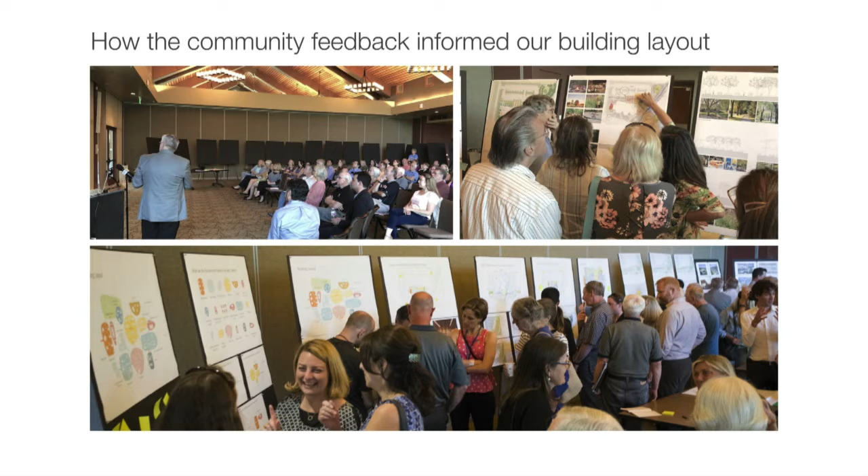So the town halls, we had 2 of them early on in November, almost a year ago, really almost like 2 weeks ago, 2 weeks from a year ago is when we started this process with our first town hall. And we had 2 town halls where really the focus was programming.

And that's where we learned about what spaces we would need to incorporate into the library. Then we had our town hall in June, in the middle of the schematic design phase. Then we completed schematic design and presented to the city council. Now, in November, we're at the midpoint of design development. So that's where we are time-wise.

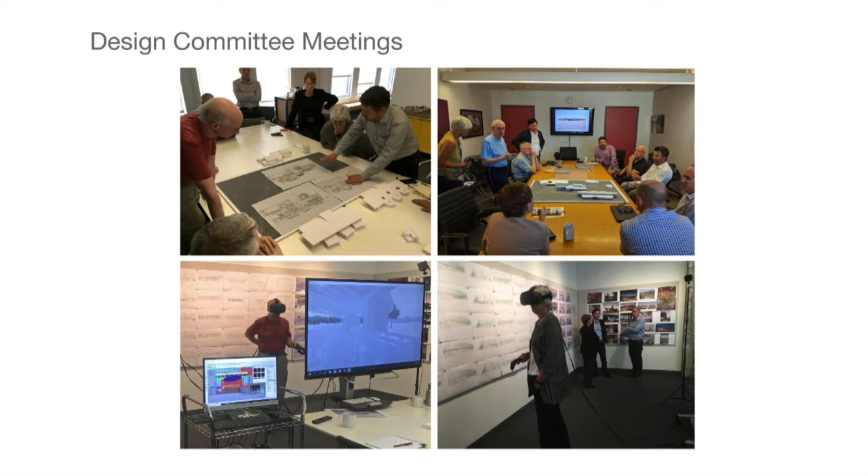And here we are in our design sessions with the subcommittee meeting. In terms of location and our site, one new piece of information from our last town hall is we now know with some certainty who our neighbors are.

We have the ball fields to the north of us, and housing development to the west. We're really happy with how this turned out, because it's a great opportunity to have a symbiotic relationship with Rec and Park at this point—we can share site development, site improvement, and site strategies in a smart way. Since we're all working on these projects at the same time, there's a great opportunity to stitch this together cohesively. So we're excited about that.

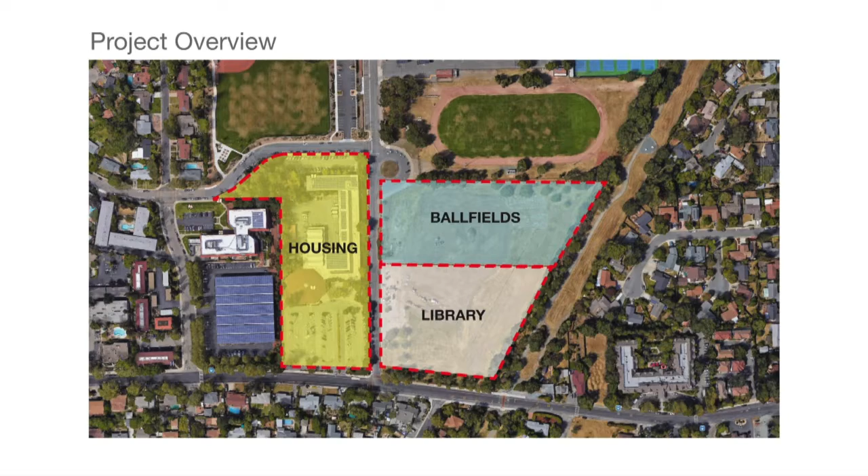Before I pass the mic to Sarah, who's going to take us through the site and landscape design, just a brief reminder of some of the principles that have guided us throughout this process. They've been with us from the very beginning of the design process, and they've held true for us.

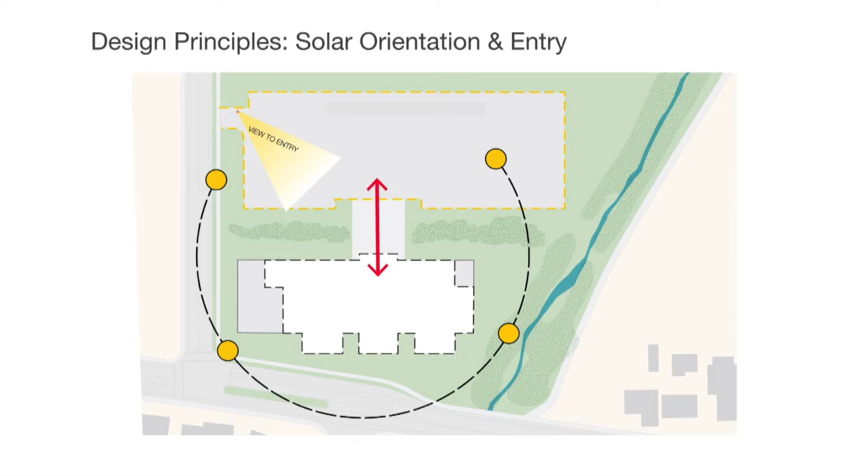One is the orientation of the building, which is elongated along Oak Park. Now that we have the ball fields to the north of us, positioning the building this way allows the parking to be between us and the ball fields, so we can share the parking—a smart way to reduce the amount of asphalt in our landscape. It's also a great orientation for solar purposes, minimizing western solar gain.

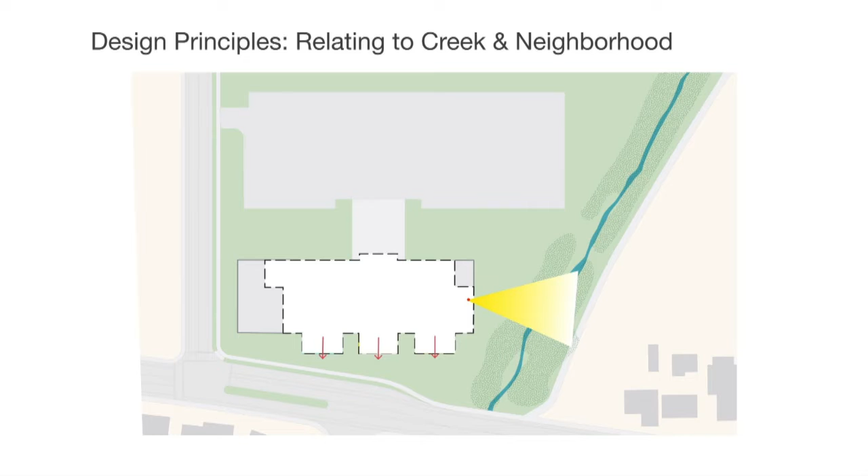We've also paid attention to the views to the creek, which has been a guiding design principle for us, and thought hard about how to mitigate the scale difference between this building and the houses across the street—adding these sort of pavilions, which has been true with us all this time. And lastly, thinking about how the building should be welcoming.

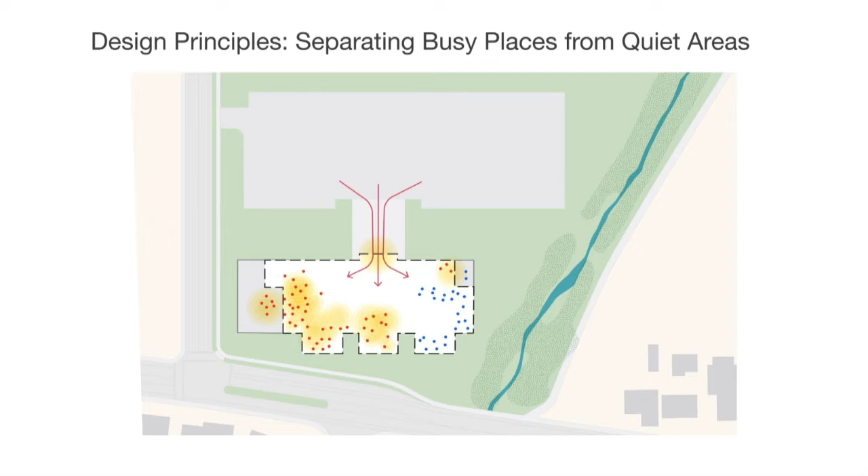When you walk in the door, you should feel like you've been embraced by this environment. The orientation of the building, its length, and these ponds allow us to begin to deal with this delicate balance we're trying to thread—having one intergenerational space that everybody feels part of, while allowing for some busyness in one area of the building and a bit more quiet at the other end. We'll get into that.

What was that? Is that an email reminder?

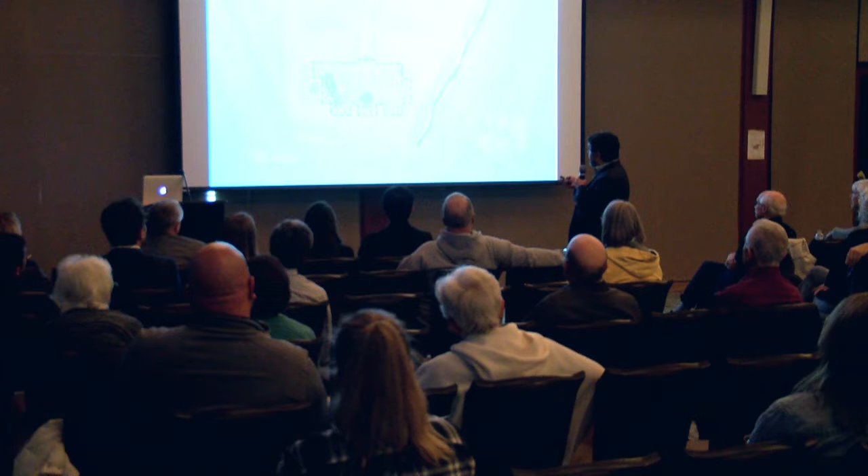So you'll see these threads carrying through, but at this point, I'll have Sarah take us through the site and landscape design.

Thank you. Sorry, a little loud there. Can I stand here? You may. Okay, I'm not going to do this—I can't do two things at once. Does this go in here? I guess I'll hold it. That's fine. No. How's that?

Okay, well, we're super excited to be back, and we've been working with the architects and really the whole design team on putting together not just what's left after the building, but a cohesive design that puts together the building, the landscape, and the ball fields as well.

Since the beginning of the project, one of the things we heard from the community, and one of the things very particular about this site, is that it's next to the creek, and that was very important and very clearly stated early on. We've given a lot of thought to how to be near the creek without overtaking it, and how to be realistic about what our project can do.

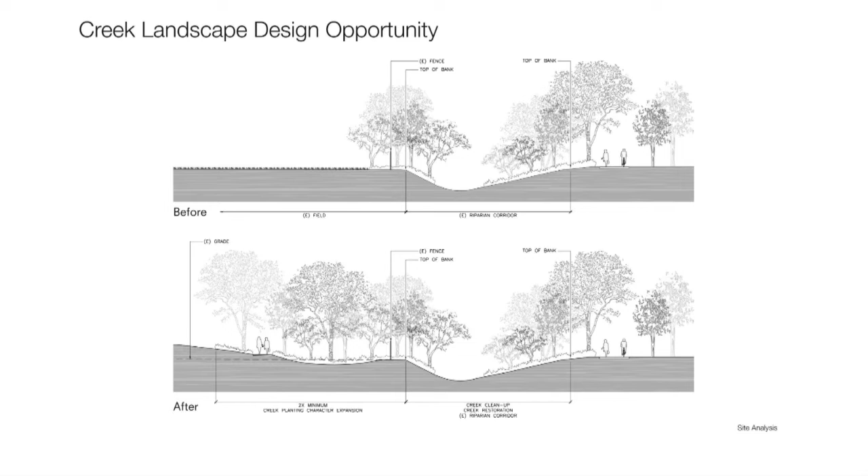In the existing condition, the creek is pretty narrow as a landscape experience—there's a smallish channel, and then it goes fairly quickly to the field on our side. So a big part of what we want to do is augment the planting on our side and make more of this wonderful setting of the creek.

We won't be working in what would truly be the riparian channel, but we will be augmenting that feeling of being at the creek. I think to the average person, they wouldn't know when they cross the line into the riparian channel. So we've thought a lot about that, and about how to have enough space between us and the creek on that side of the building.

As we've developed the project, you'll notice a couple of things if you're paying attention. One is the building used to be at a slightly different angle, and it's rotated ever so slightly now, so it's squared up to the parking lot. It's also a little smaller, not a lot smaller, but a little smaller, and there's a little more space between the building and the creek.

And we've made a much bigger gesture that we're calling the garden, but I think it could also be called a habitat buffer or a natural garden. It's not a garden in the sense of a manicured garden.

The program you see on the right is what we worked on with all of you and with Margaret to establish what's going to happen here, what things need to happen in this place. I'll talk about these in more detail, but they're the ones we showed you at schematic design, and the ones we still have today.

Part of what we're doing is trying to get things located near the library to extend program outside, but also to connect trails for bikes and peds, and create a sense of arrival beyond the actual site of the library.

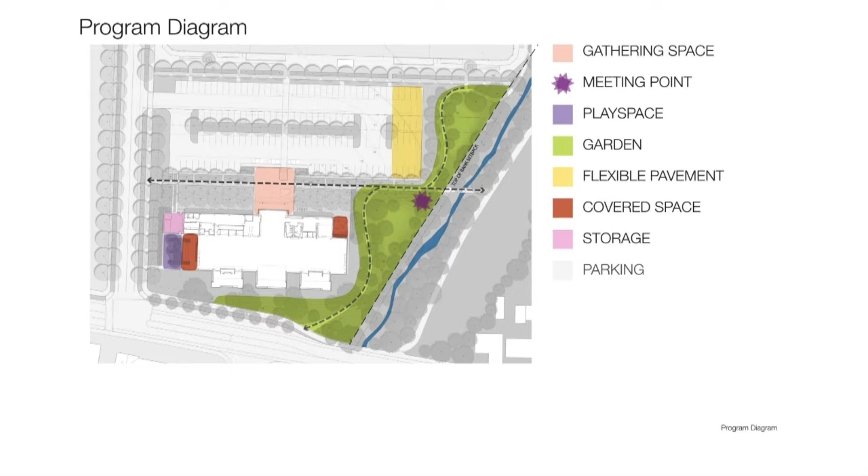For today's conversation, just for tracking, we'll walk around the building, starting with one, which is Monticello Avenue, and this new opportunity to arrive at a set of civic places - the library, the ball fields, the middle school, the other park - an amazing set of things for a community to have near one another. We'll also talk about the yard, a space that is fenced but outdoors and part of the library, the arrival and drop off, and then finishing with the creek.

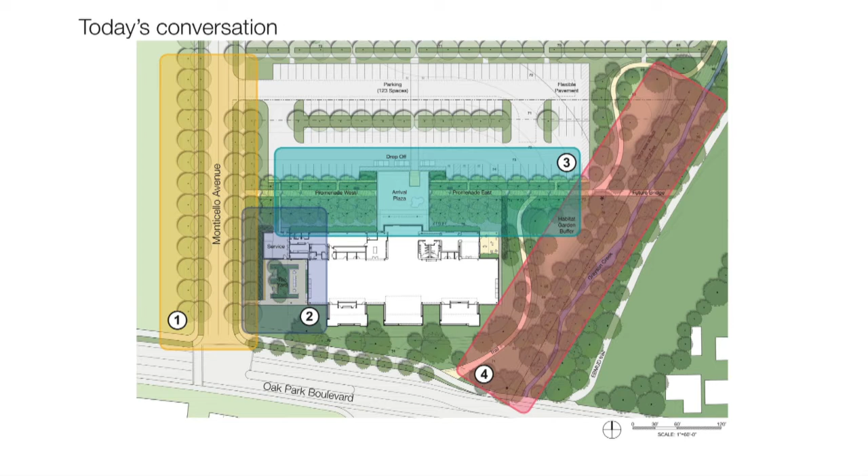So first, Monticello. Monticello is under study right now, but we feel we will be able to achieve a section that is really welcoming and civic and makes you feel like you're supposed to come here. It has bike lanes newly on it, and it will welcome you into all of these amenities with a kind of stately planting.

I'll talk specifically about what plants and that kind of thing at the end of this, but we're working to have plants that will be appropriate to this climate, but also have a kind of stature and elegance that is appropriate to the community.

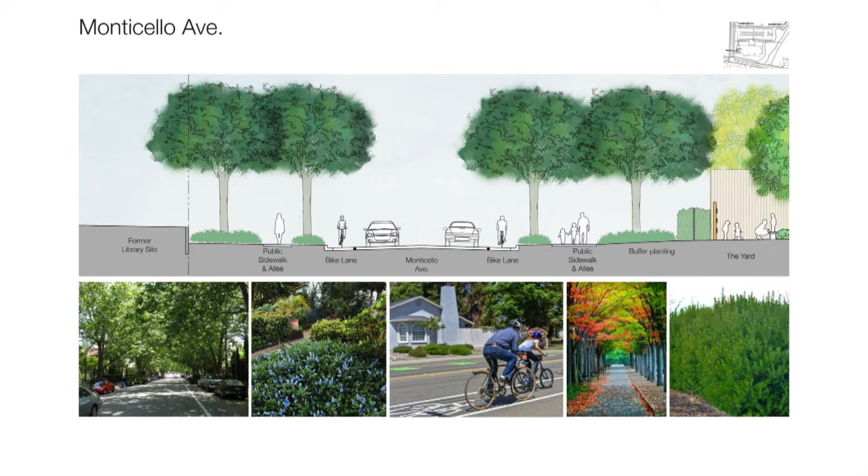The yard is located immediately adjacent to Monticello Avenue, and this, I think, is going to be an incredibly important place to everyone in the community - to have a place where you can come in the front door of the library, be outside, and then also go back into the library. It's a secure space. It will extend a lot of things that are already happening inside the library.

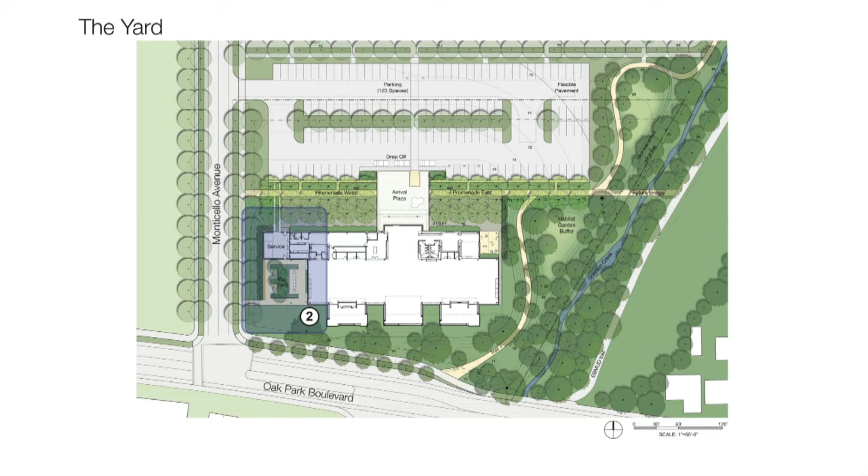We've talked about it as an opportunity for just a view to a garden, and there's going to be beautiful trees in the space. It's also a place where if you wanted to do paper mache and slosh water on the ground, or maybe have a visiting petting zoo with goats - we've talked about all kinds of things - this is where you could do it, so you didn't get the library dirty.

There'll be some opportunity for play for kids that's more vertical on the outside wall, and the actual floor plan is a circuit, so kids can run around. So if you're at story time and getting wiggly or need a snack, you can come outside and do something, then come back in and join it. But also at other times of the day, it would be a great place to read a book outside under the shade of these trees.

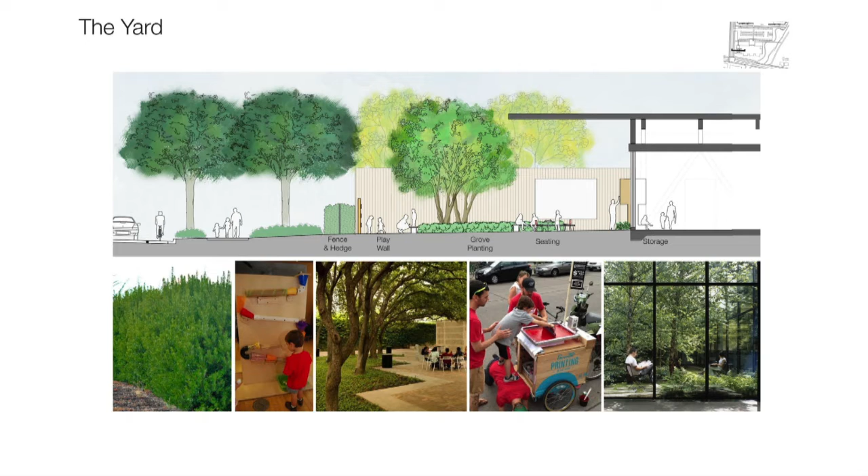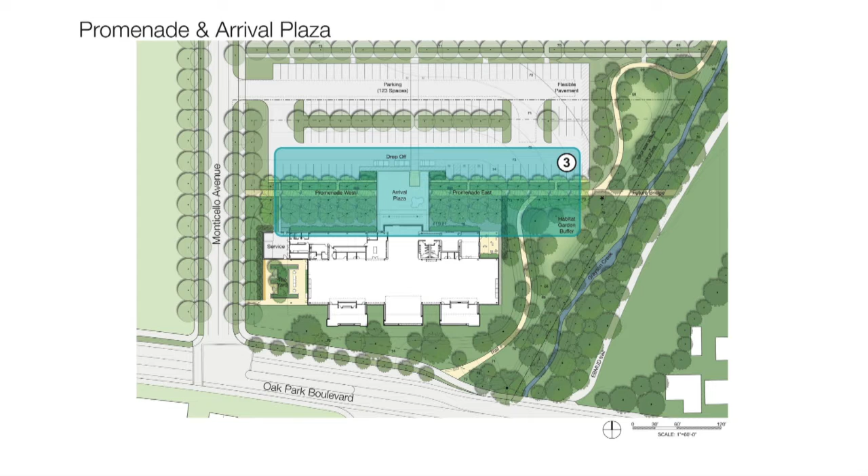The promenade and arrival plaza is something that a lot of thought has gone into, wanting it to feel very welcoming, thinking about the microclimate of where we are and wanting to have shade, wanting it not to feel that between 2 and 5 p.m. on a school day you have to cross a gauntlet of middle schoolers to get in the front door, and a number of other design parameters of what would make a really elegant entrance to the library that was welcoming. David's talked a lot about this sense of an embrace as you arrive, and I think the trees together with the building are making that happen.

The way this is currently structured, the building roof for the entry lifts up and sort of welcomes you in, and on either side of it there's a grove of a triple row of trees that has gravel underneath it and movable furniture, so if you wanted to sit out there, very stately. We've talked a lot about the character of these trees not being too dark and shady, allowing views through.

And then we're still talking about having a place in the parking lot where you can sequester off a small piece of the parking lot pavement to use for other programs. So we're getting double purpose out of that paving.

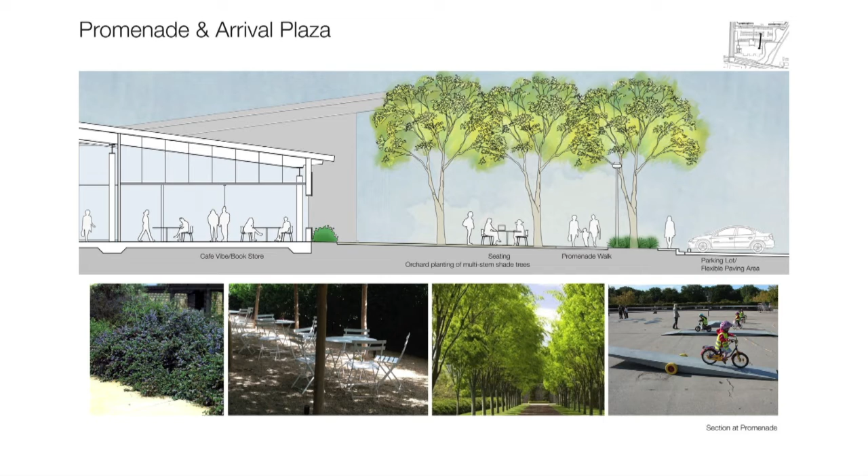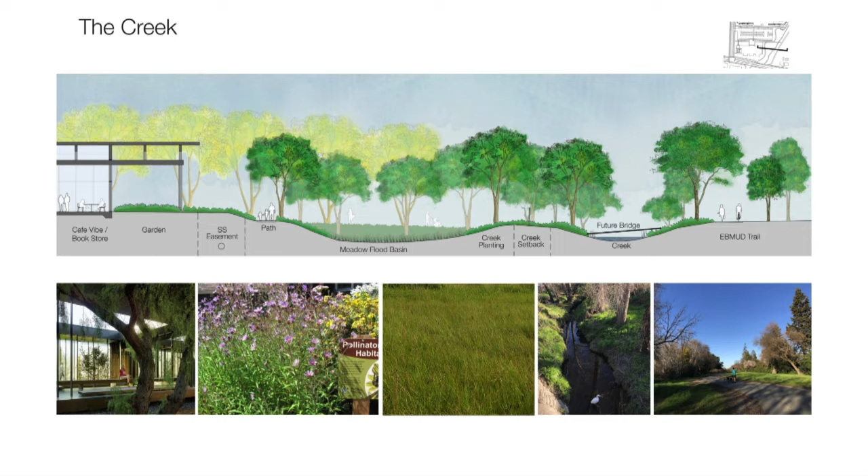The last part is probably where we've had the most change, and in some ways is really exciting for the project. We've been looking at how to control the area and how to make it successful in terms of a buffer for the creek and also a great setting for the library. There is a meadow that will also be able to take additional waters as needed. So we're imagining there's quite a bit more space here now that allows us to have a really robust piece of native planting with trails on this side of the creek, and potentially in the future to connect across the creek to the EBMUD Trail.

In all of our thinking about this, we've talked about plants, and we've talked about wanting plants to be an important part of the design. We've actually worked hard to minimize the amount of pavement in the design. Some of you know a lot about plants, and I would love to talk to you in great detail about it after the presentation. The main thing I wanted to communicate to the group is that plants are tricky, and you're always weighing a whole bunch of criteria.

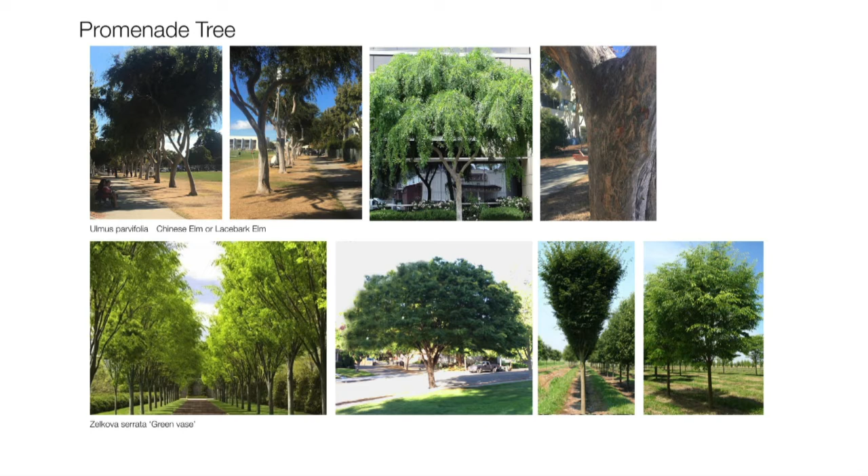Currently, the majority of the plants are native. There are some places, like the promenade tree, where we're considering some things that are climate appropriate but not necessarily native, for structure, for form, for matched specimen availability, and we'll continue to work on this as we go forward.

At the creek and in the upland, where we're augmenting the creek landscape, we have a sort of oak-heavy palette, I would say. And we also have a palette that isn't making places that are too dense at the ground. We're trying to keep view lines open and make it seem like a very spatial landscape you can look across in this area.

So in conclusion, I think the big shift in many ways for us in terms of where we were in schematic design versus where we are in design development has been that we have more space between the building and the creek, and we've really been attending to questions of sustainability and how to deliver the project within the budget with maximum sustainable value. So we have a habitat garden and buffer, which has gotten a lot bigger. We have stormwater treatment in that area, which will be great for making a range of plant palettes and types.

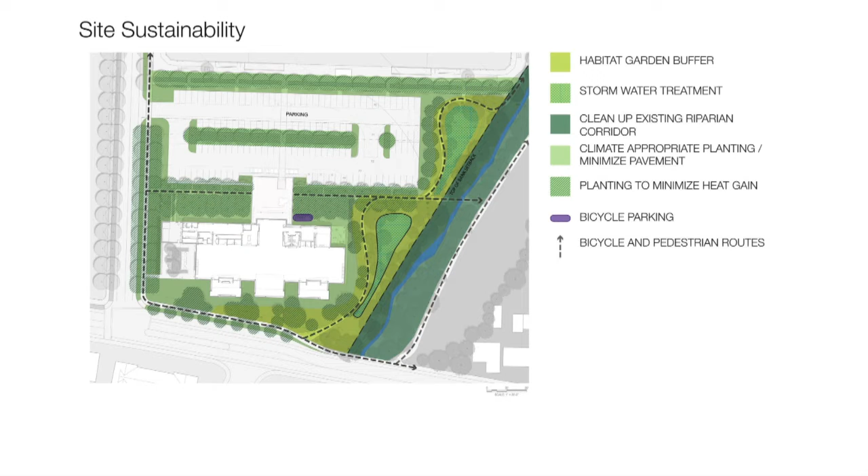We'll be cleaning up the existing riparian corridor, which means removing trash and removing invasive plants. We're working to have connected trails and a great bicycle experience. And we're working to minimize heat gain, both on the building and also for heat islands in the parking lot. So when you look at all of this, and consider that we're sharing the parking lot with the ball fields, we really have a lot of planting and not so much paving, which I'm personally super excited about.

And that is an update on where we are to date, and I'm going to pass it on to Mike.

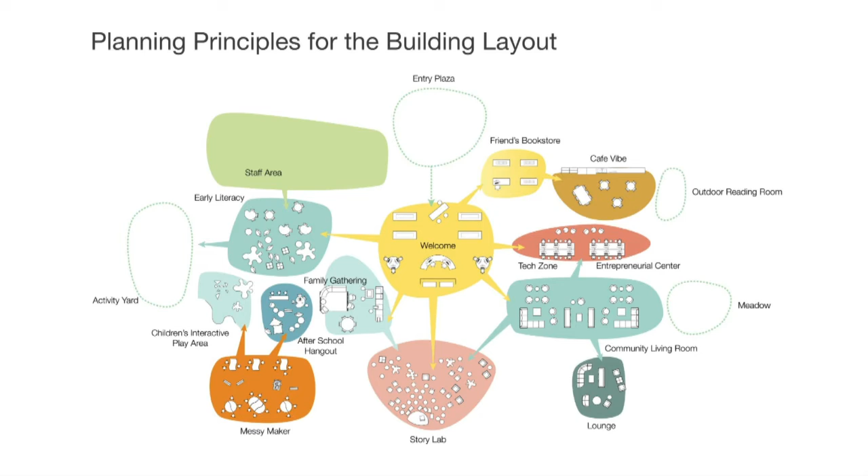Before we launch into our updated renderings and views, I wanted to remind everybody of the planning principles that guided the development of the plan and ultimately the project. This is an image we've constantly been updating since programming, which talks about the places and spaces of the new library and also their desired adjacencies. This has mapped out into our current plan.

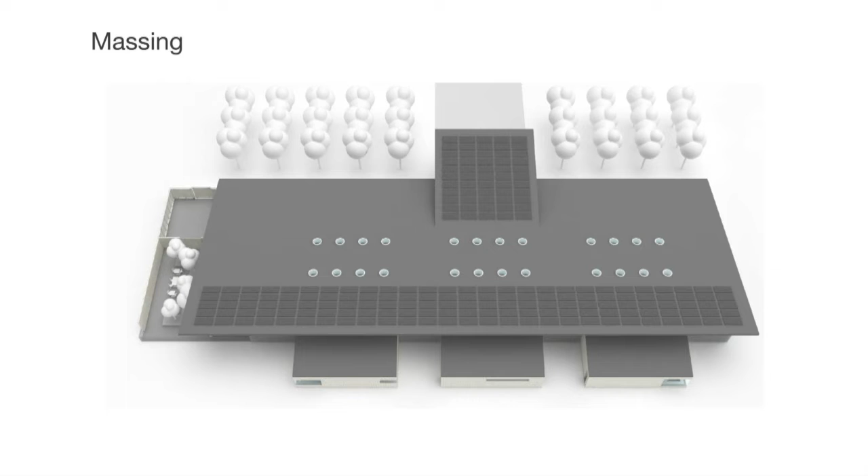So this is the same view with the roof put back on. We can talk a little bit about the massing of the building.

The main hall and most of the northern portion of the building has a large sloping roof that's sloping up towards the south. The roof is lower above the spaces at the top of the building that don't need such a high ceiling, and the vaulted ceiling really starts when you get into the main hall.

The entry has its own roof element that pitches the opposite direction, towards the north, so we get this really tall north-facing wall, letting in a lot of beautiful light to the entry space.

And then the 3 pavilions to the south help, they have this volumetric expression which relates a little bit to the neighborhood across the street, and help shade the building a little bit from southern sun.

Two rows of skylights are shown here to get diffuse, balanced light deep into the floor plate of the building, and we're showing areas for solar panels on the roof. We're working through this with the city, and we'll be fine-tuning this as we get more budgeting in place, but this is something we're hoping to do.

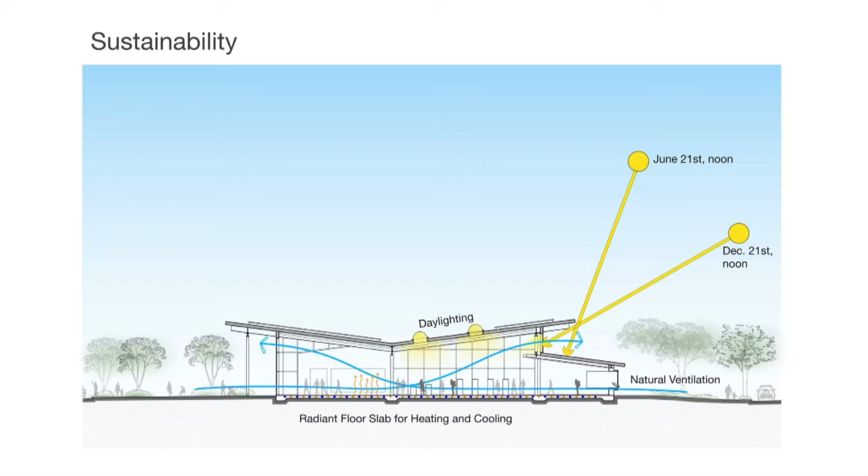Other things — we already mentioned the solar panels, you can see that diagrammatically shown here.

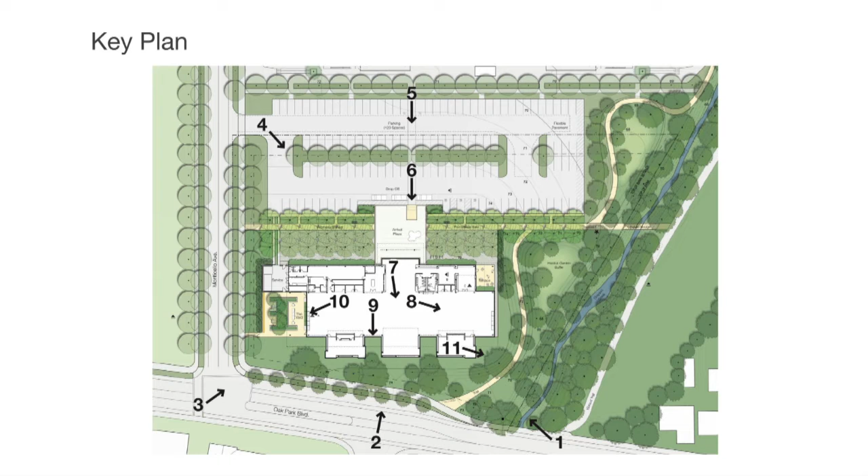So you'll see here the arrangement of all the trees that's proposed, but for the benefit of showing you the building, and to not discredit everything Sarah has done, we've made these trees relatively transparent so you can see the building. In actuality, the landscape is going to be so great that the blend of building and landscape will be a really rich pairing.

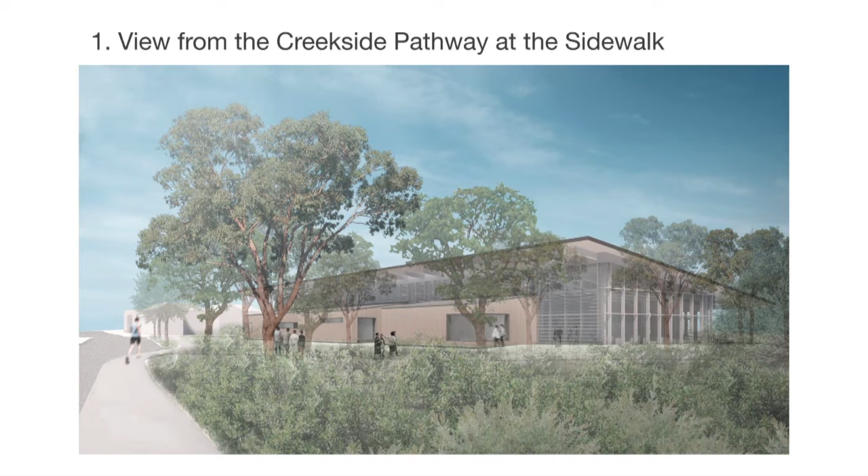The modulation of this facade has three elements we call the pavilions. They each have a similar material palette, but are purposely designed with different window arrangements to relate to the activities going on inside, and to describe some variation of what's happening throughout the library programming. In between these pavilions are a series of glass walls shaded with a series of louvers, which we'll show in more detail later.

This allows views to the exterior and inward, while protecting the building from incoming sun. So the objective of the sustainable strategies Mike described was really to give the space a very welcoming daylit environment without all the incoming solar gain from the sun.

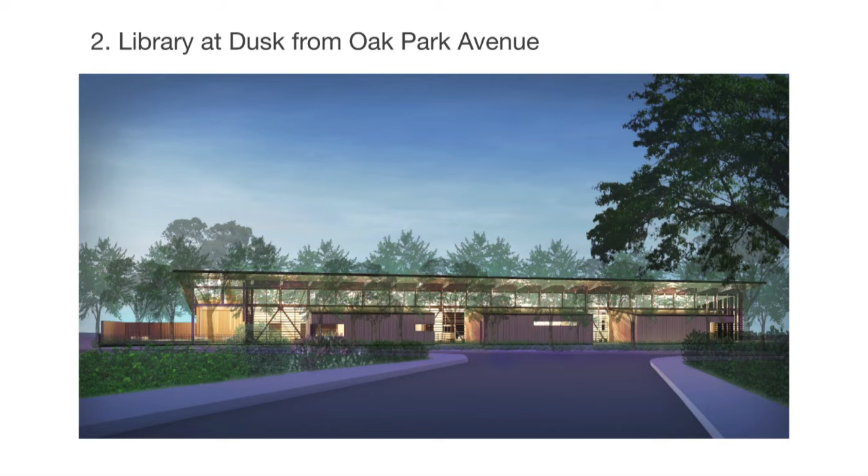The yard, at one end, is semi-enclosed, but also allows for visibility along Oak Park to see the activities that might be occurring in that space.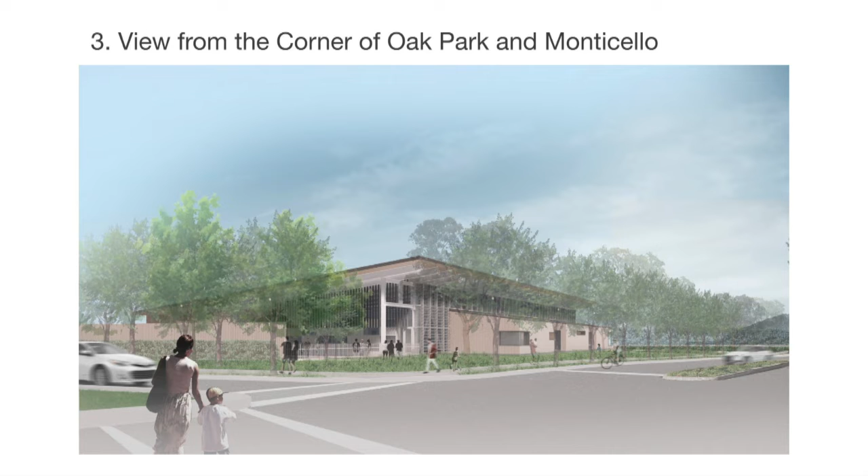Next view to the corner of Monticello and Oak Park. Again, the yard view is a semi-protected zone with transparency allowing the view in. At this point there's a hint of the story area for the kids, not just the lab, but the interactive zone just inside, underneath this covered roof form.

You saw this earlier - we've made the turn up Monticello into the parking lot. As you arrive at the building, this would be your view, aiming your turn right at the primary entrance. As Mike described, it's rising up, a welcoming gesture to all the visitors.

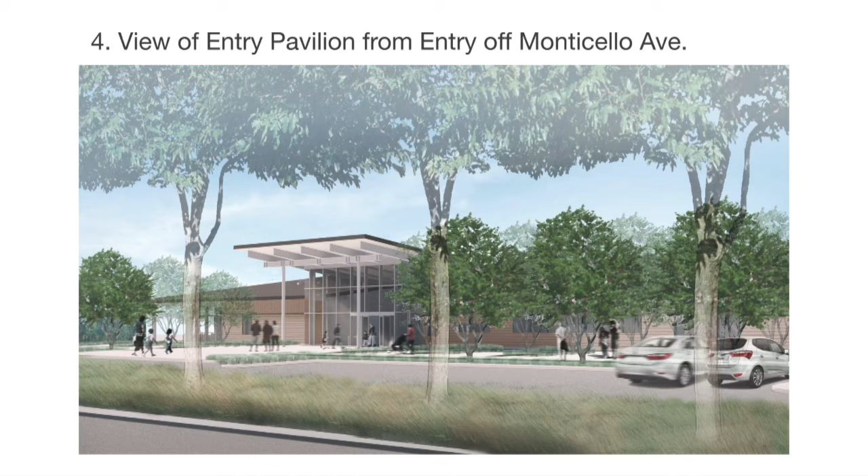A dusk time view showing you the openness and transparency, the welcoming character. All these views will be up on those panels, so you'll get another chance to see these a little later.

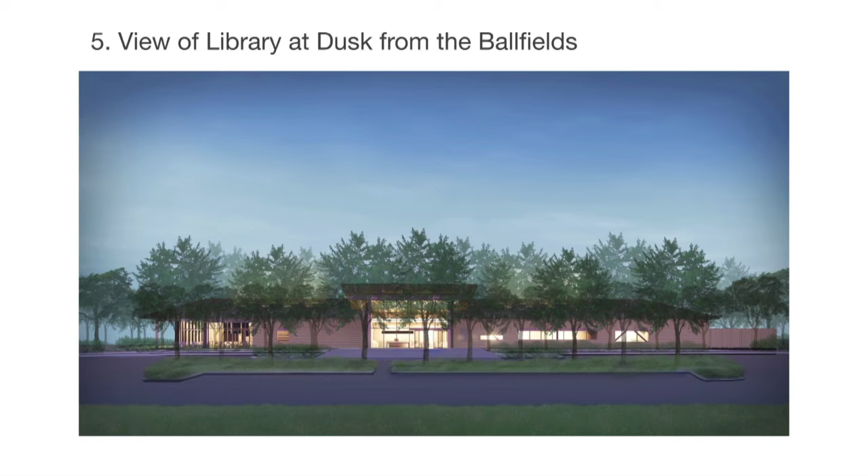Again, the trees are somewhat translucent to show the building, but this layering that Sarah described - from the edge of the ball fields, which has its own landscape zone, the trees in between, the rows of parking, and then another row of trees in front of the building - is going to create a very lush environment.

So here's a little photo survey of the materials we're proposing. In order to get this very open building, we'll have a window wall system with a great deal of glass, an aluminum system purposely designed to deal with the heights and the size of glass panels, and a painted steel structure. Right now we're proposing a very light color, perhaps white, maybe not pure white, but a white-like color.

It's augmented by a wood ceiling, and we're still looking at the shades for that. It may not be as dark as what's above, it may be a little lighter, but we're looking at this palette of white and a light-colored ceiling as the feature of the underside of the roof.

The roof material itself will be a light silvery standing seam to give it a glowing quality in the light. And to deal with all the incoming sun, there's a mixture of horizontal and vertically oriented louvers to shade all this glass.

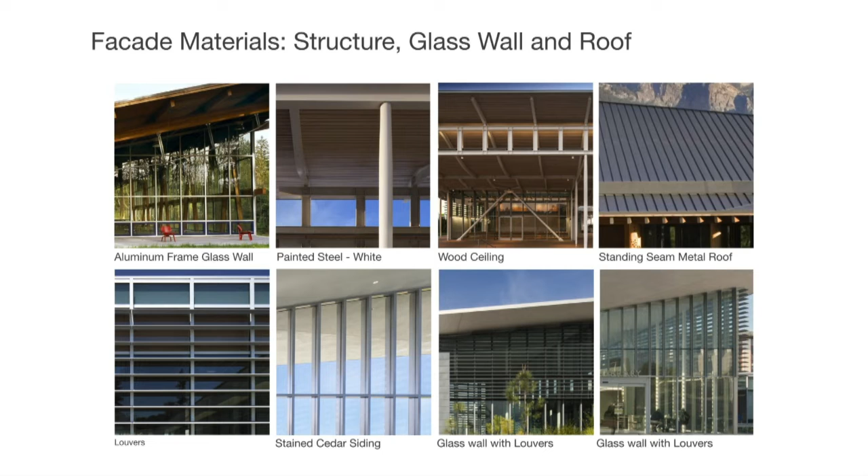For the balance of the building, we're proposing some kind of siding material - we're looking at more wood material, but also the potential of cement board, which is a very durable product. We're also considering the shade, the variation of color over time, and the maintenance of all these materials, as to whether this building would be suitable for a natural palette, or whether we'll go with a more neutral gray stain effect to blend with the other materials.

So this is still part of the process of our design development.

Here we are at the front door, the welcoming plaza that we only recently developed. There's a lot of elements that are going to be part of this plaza, so it won't be so wide open. We've got parking stalls, some other amenities, and trees on both sides sort of shading or framing your view to this entry door.

Point out one thing that Mike described. This roof, as he said, is sloping up, or as you enter it's kind of coming down towards this point where it pitches up. So even before you get into the building, you're beginning to see a glimmer of daylight as the roof kind of pitches back up.

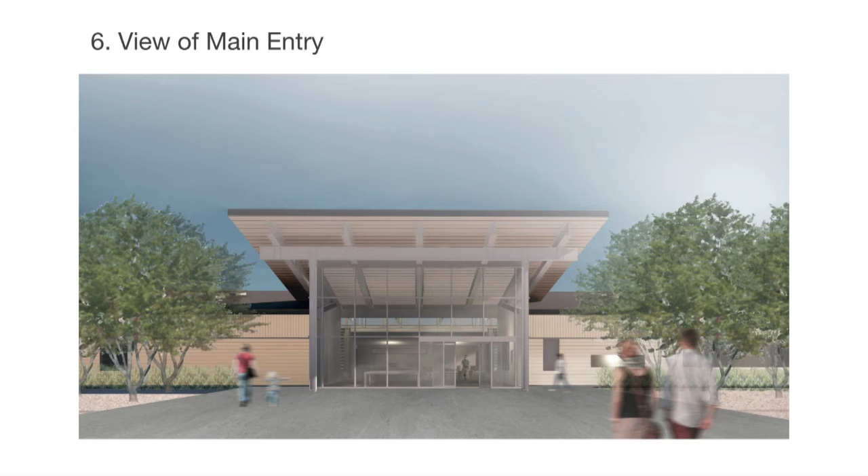So once you get through the front door, you get to the story lab area. We've gone through the front door with this view, and we're in that welcome space. On the right side of this wall would be all the check-in, check-out stations, those display tables, and the circ desk right here. Then you're seeing the story lab beyond.

Apologize if this seems a little washed out - I think the images on the boards will be clearer - but you can see that clerestory of windows along the south wall. You can see the ceiling coming down, then pitching back up across that beam, the clerestory in the story lab pavilion, the full glass wall in between, and then the lounge pavilion over here.

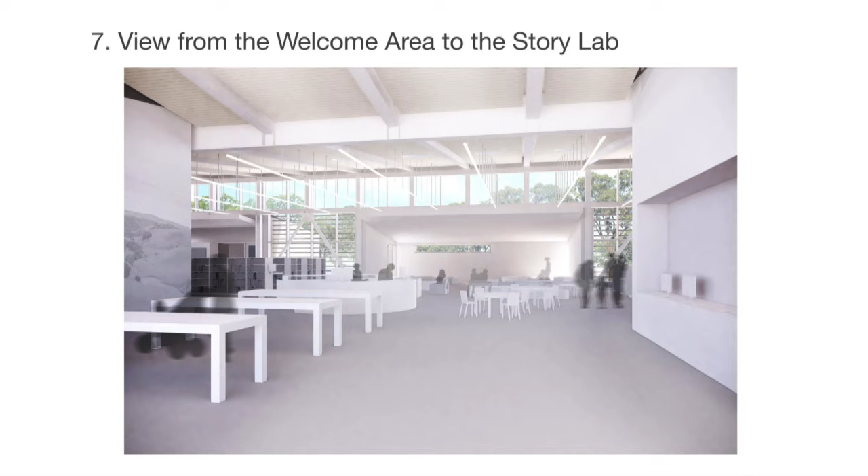Even with the images washed out, I think keeping the palette light is going to help with our daylighting scheme. The lighter we can keep the ceiling in color, the natural daylight will balance out a bit better, and it'll reduce any glare you'd have if there were dark materials.

Here is looking at one of the open bays between the pavilions, between the story lab and the maker space. This full height glass wall looks out towards Oak Park. We've got all these trees screening that view, and these louvers are helping to shade low angle winter sun. Our roof overhang here is shading this wall, the entire wall, during the summer months - that passive strategy of fine tuning the wall and the overhang to get a really beautiful daylit space. You can also see some of the work with our structural engineers on the seismic bracing and integrating all those details.

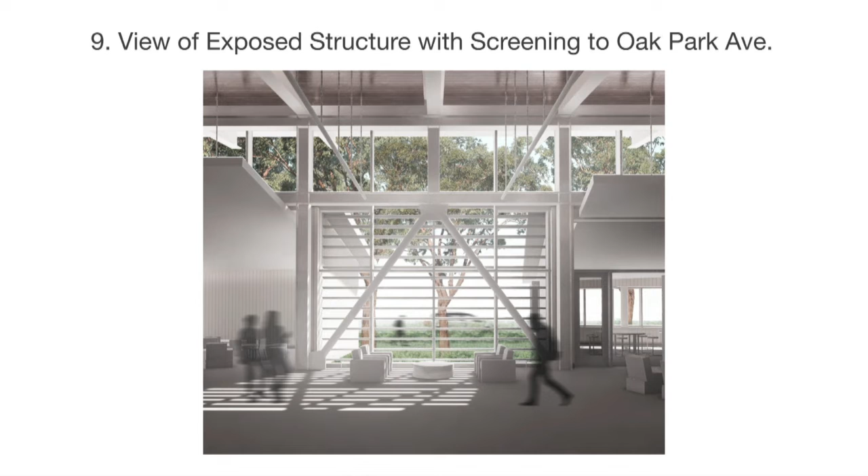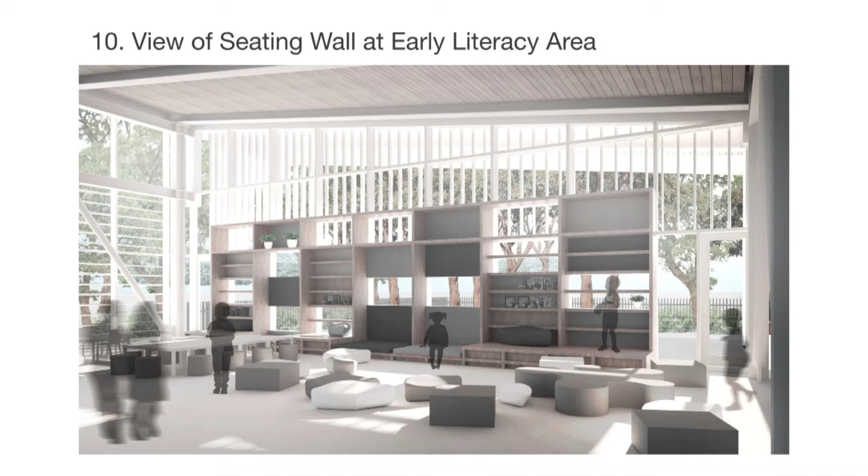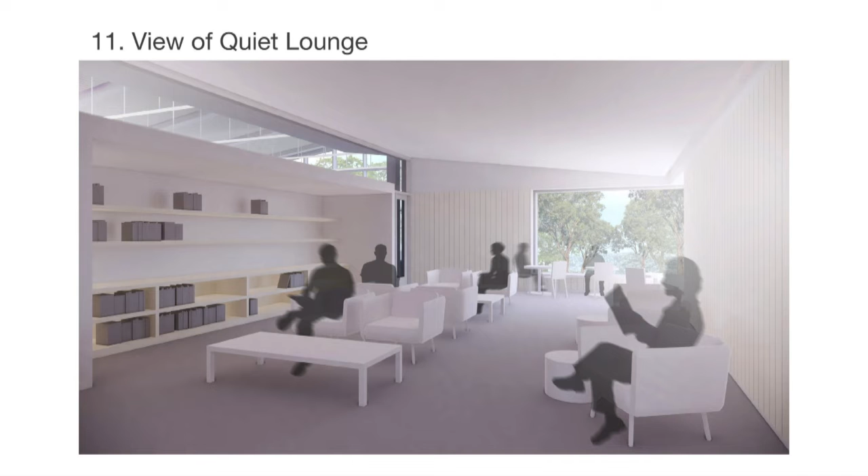Keeping the palette pretty clean and classic and using pops of color to highlight some of these feature areas, whether that be with carpet, decorative light fixtures, and the color of furnishings can really make things pop, but keeping it classic at the same time.

We've mentioned our white steel structure, wood millwork. Most of the floor will be carpeted, which helps a bit with acoustics and comfort. Acoustical wall panels where needed, and painted wallboard, and we've got feature wood ceilings. So we're going to be continuing to work on this portion of the project.

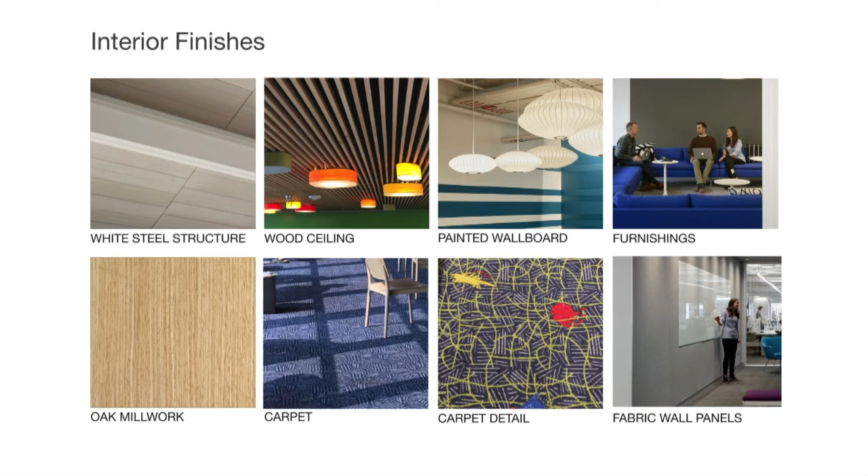It's so wonderful to see you all again. It's been a year. It's so hard to believe.

So as we continue to develop the interior space planning and the furniture and the layouts, we continue to be excited about all the amazing things you're going to be able to do in your library. And remember when we came up with this list? Remember how many of us felt, how in the world can one building support all of these functions?

So as we've been designing this 21st century library for all of the experiential learning that libraries are fostering today, not only are we designing spaces to intentionally support these activities, but the entire building can often accommodate multiple functions at any one time. So it's going to be highly flexible. And you guys are going to help me grow that list. We're going to do even more in this building.

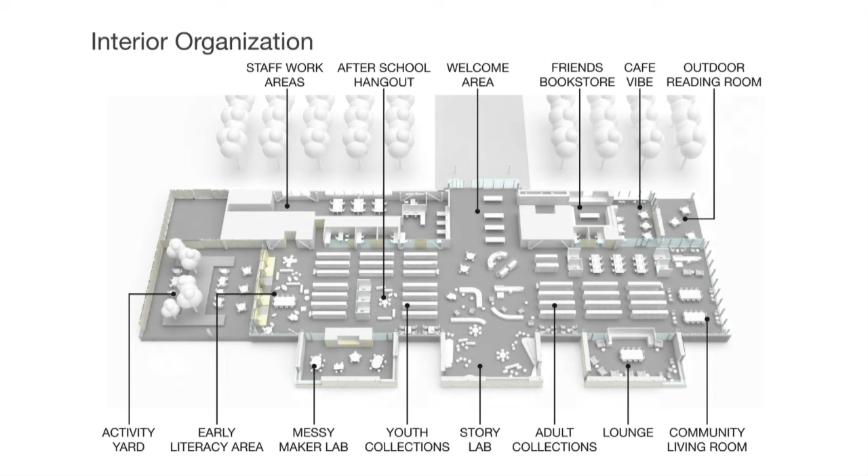So sometimes we refer to this plan as the resting face of the library, but the resting face will never, ever, ever look like this after it opens. Patrick and his inventive team will always be transforming this library to be nimble and flexible and adaptable to all the amazing activities and programs that you all will enjoy.

Well, yeah, I feel like I've been at Pleasant Hill for a little over 8 years, and many of you have been using that library a lot longer. Well, I actually grew up with the library, but I've been working at that library for about 8 years. Think about how much it's changed in just that time. And so I'm just so excited about this design that's going to continue to flex and change and grow, because the next 8, 10, 20, 50 years, who knows what it's going to bring for us.

Anything is possible. So who's ready to take a tour? All right, front door.

So what's going to be wonderful about when you come in is not only in that welcome area will the display be designed for popular materials, collections, the latest movies, the newest format and storytelling that hasn't even been invented yet. It also will be a place to showcase all the amazing creative projects that this group does day in and day out. On the way to the Cafe Vibe, the Friends bookstore area is going to feel just like the best bookstore in town.

And then when you get into the Cafe Vibe area, it's going to be, what did I always say during programming? The first choice for the third place in Pleasant Hill. No cafe or coffee shop is going to beat it out, right? So it's going to be wonderful.

I feel like the beautiful models that we just saw, the renderings that we just saw, you see those display tables, but there's no books on them, right? It's just a model, and I feel like what's so wonderful about this opening, this welcome area, is you walk in and you'll be confronted with this amazing array of stories. That's the first thing that you're going to see. That and the friends of your neighbors.

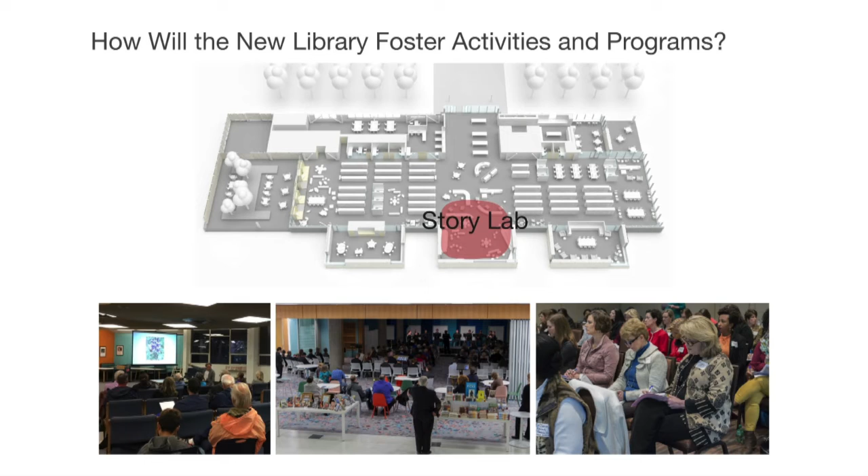So you'll be immersed in the library in all of the areas of the great room. Also, welcoming folks into a program. You may happen into the library when you didn't know something was happening.

We want to make sure that you're welcomed into that event, whether it is a story time or an author talk. We want it to be something where it's like, come on, drop in and grab a seat and enjoy this. We don't want to hide any of the magical experiences that we're trying to create.

So what's going to be wonderful about the space is you're not going through a dark corridor to make you feel like you're in the former conference room of the offices to get into the makerspace.

But it's intentionally designed to foster project-based learning, and it also is going to have tons of storage and great natural light. And those were the two primary functional requirements that we heard loud and clear from the folks that conduct the maker programs.

I think about all the things that we're doing now, from Legos and the robots and the machine sewing, the eco studio that we have that's so wonderful, arts and crafts. There's so many different. We have quilting and knitting and weaving groups that often meet in there.

There's so many other kinds of making that we haven't even scratched the surface on, and I'm just so excited to see a beautiful home for all the things that we do now.

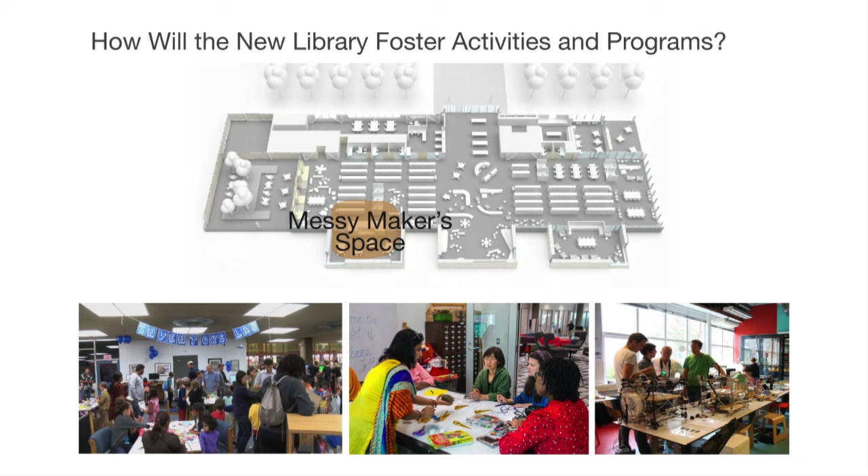And really, I think maybe of all the spaces, this one is going to unlock so many possibilities that we hadn't even imagined before. But hands-on learning is the way of the future. There's so many folks of all ages, but kids especially, that learn in these different ways, and we really want to make sure that we've got a space where they can learn by doing.

Who wants the best view in the house?

Peace and quiet. What we would traditionally call the adult section of the library is now really designed to have the diversity of experiences and spaces and places that all of us need throughout the day. A view to the creek in the intergenerational community living room for us to be alone together. The quiet lounge for reflection and respite and escape. The technology area, the group studies of a variety of sizes and shapes.

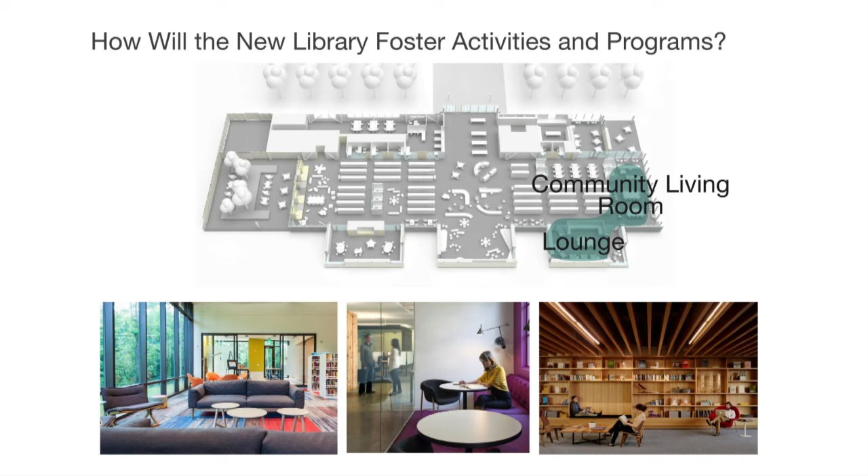So it's nice because it will function even in this variety that we've identified. It will function to support all of the variety of needs that you all expressed you had in the library, both conventional and innovative. I feel like for all the sort of boisterousness and buzz that we've created at the Pleasant Hill Library, we all still really deeply want those places where we can just hear ourselves think. And there's a shrinking number of those spaces in our world, right? This is going to be one of those spaces where you can just be with your thoughts and dial it down a little bit and really fall into a good book.

I want to crawl up in there right now and plop on that couch. It's going to be a really relaxing space. And with that view too, I just feel dappled light and the view of the creek, birds, and it's just going to be a really, really relaxing spot.

Okay, there's some moods of the day that this library will support. So who's been in the space from 3 to 4:30? I often call it the teen takeover.

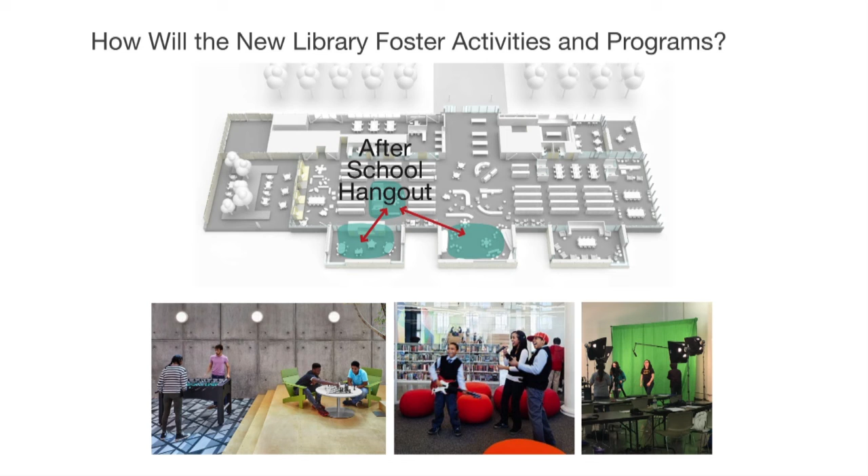Yeah, just learning through play, games, and just open-ended play, dramatic play that brings kids together, sometimes for the first time, right? Before they even get into preschool and kindergarten, right? This is where they're making their very first friends at the library.

And the continued environment that will be designed for hands-on learning. So this is going to be a really fun space. Yeah, and again, really, really super flexible. There's just unlimited space for us to innovate on this and just sort of watch, based on kids and families' behavior and their demand, what we can provide and just change up the space, bringing in new furniture, new kinetics, pushing shelves around, which will be on wheels so that we can just do different kinds of things in this space. Just unlimited flexibility, which is, it's going to be so wonderful.

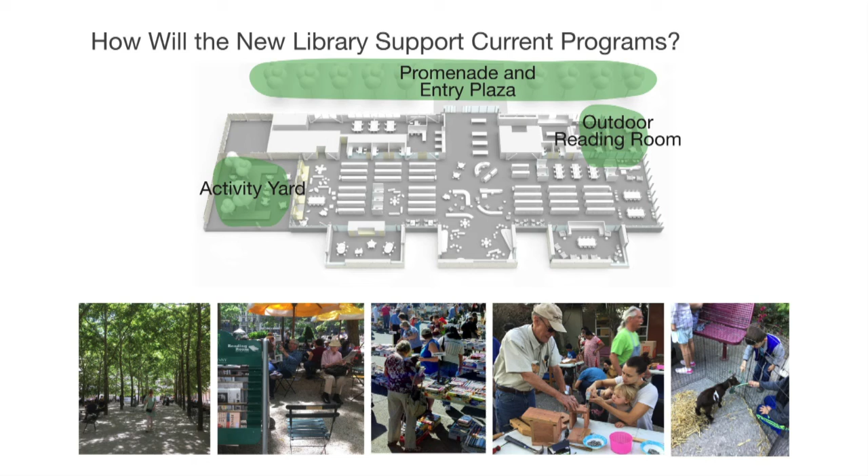Yeah, the weather here is so great, right? I mean, just imagine, just grabbing a chair out there underneath the shade. It's going to be so, so lovely with the views, too. But yeah, I feel, too, like the promenade and entry, we really don't have that now, right? I mean, we have a pretty sad little patio. And so for every kid that's waiting to get picked up, everybody who's finding a spot to just have a sandwich before heading back in the library, this is going to be a really, really nice place to hang out and wait and connect with other people.

And that activity yard, too, I'm really pumped about because that sort of zone that's outdoors but is still really tied to the indoor space. I think especially for youth, being able to get out and run around and then dial it back down and come indoors, having different ways to play indoors and out. And for the really, really messy stuff, right, we can take the really messy stuff outside. There's just so many possibilities here. I know that you're going to bring even more energy and ideas to all of these exterior spaces, and they're just going to be magical. So who's ready to come on in?

I seriously am ready to climb up in that. I've been waiting so long to see this come to fruition. I think I mentioned, I grew up with the library we have, and working with this team, of course, working with the city, I mean, you can probably see, I just can hardly contain myself. This is going to be such a special building, and the spaces that they've started to shape for us are just so tremendous. But I feel it's really you guys out here. You guys are going to be the ones to breathe life into this building when you come into it, and it is going to breathe. All day long. It's going to ebb and flow with different energies and different folks wanting to do different things. All of that's going to be welcome, and now all of it will have a place. So thank you guys.